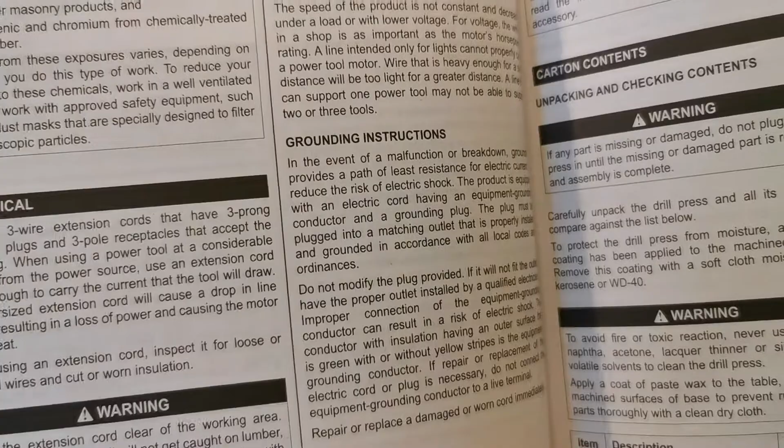There's a list of the parts that should actually be in the box, which is helpful if you want to actually use the drill.

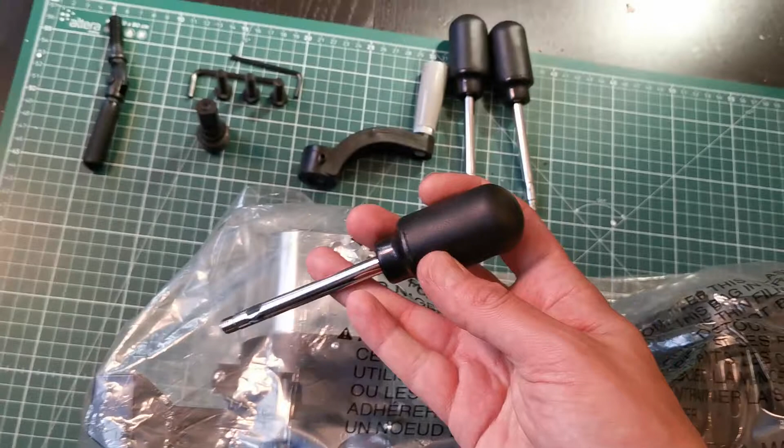So here are the handles. These are like this a bit. It's squishy from the end, but the sides are actually pretty firm. Can you see it? I can stick maybe just a bit of my fingernail in it. But here's there's like an air pocket inside there, so I don't know. This seemed to be some kind of plastic, rubber, something.

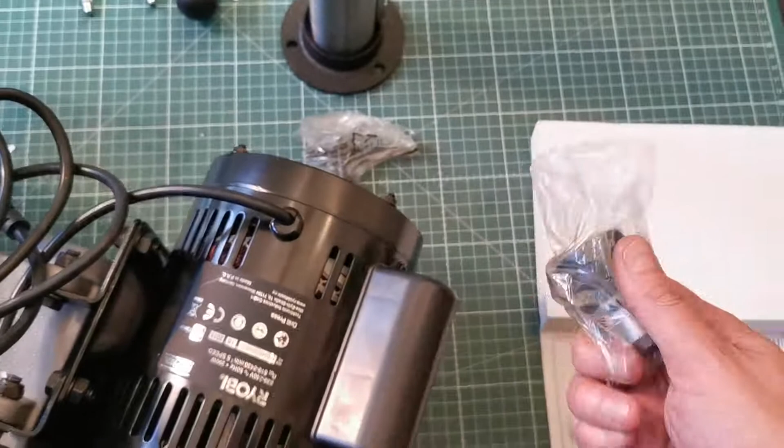Alright, I'll remove the wrapping from the stuff and we'll continue. So I've been peeling off the wrapping from this, and there's the chuck key. I'm pretty sure we have everything we need to put this together. The chuck came in a little box.

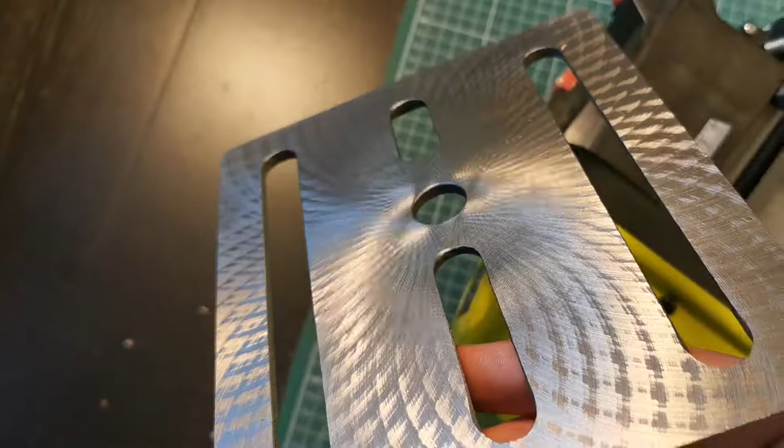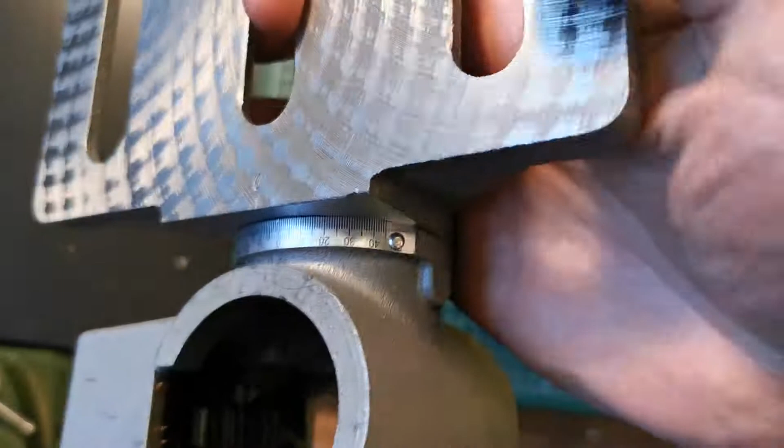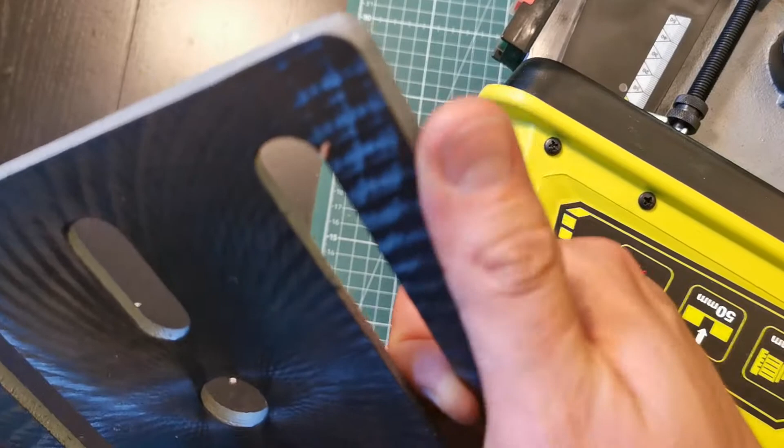This is pretty, well, this isn't really a precision machine anyway, but you might want to sand this a bit or do something. The edges are, well, you can't cut yourself, but you might scratch the piece you're working on, like if it's some kind of wood, and you hit it on that edge or slide it across, that might actually scratch. So you might want to file these edges down a bit.

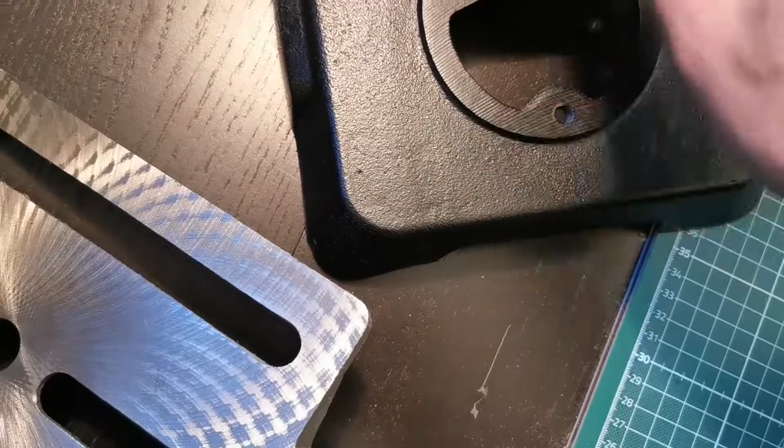Yeah, they didn't really bother to do much with the edges or anything, but I guess it's fine. At least there's a coating on everything, so it shouldn't start to rust too quickly.

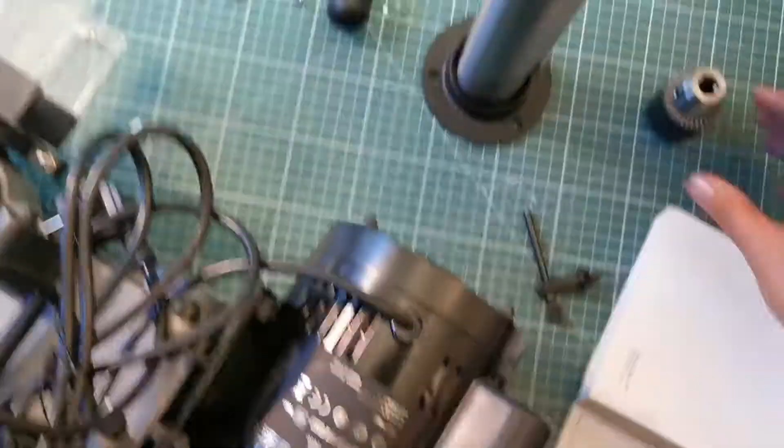It does have some slack in it. I guess it's fine. Let me turn on the light. I don't know, can you see in there?

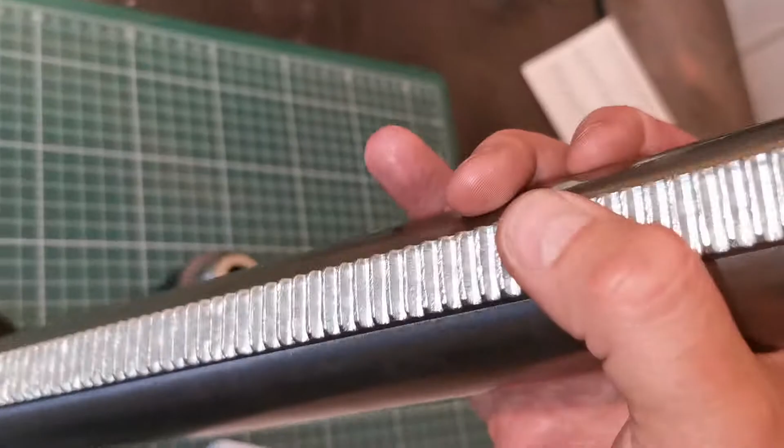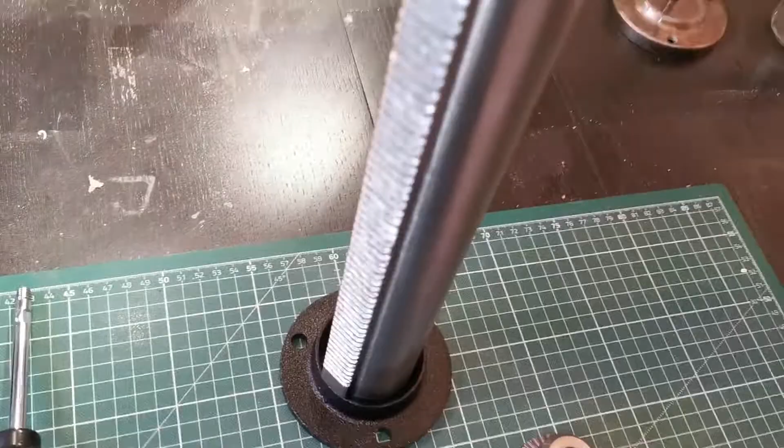The finish, well, it's not polished. You can't really see much of a reflection on my finger. I don't know, man, doesn't look too great. But it's not like we're building watches or something with this machine anyway.

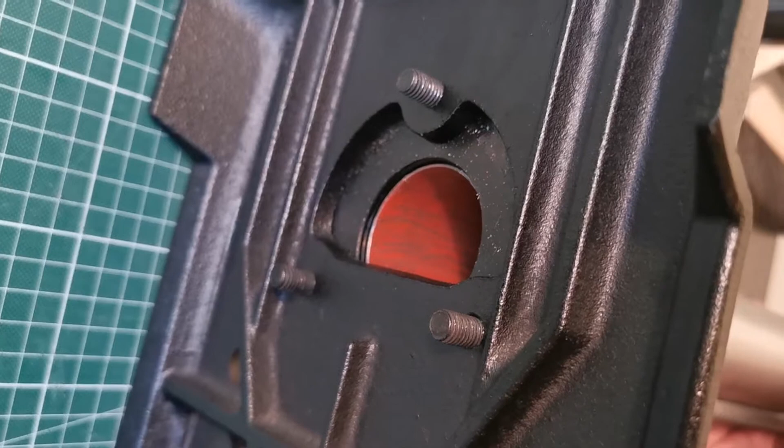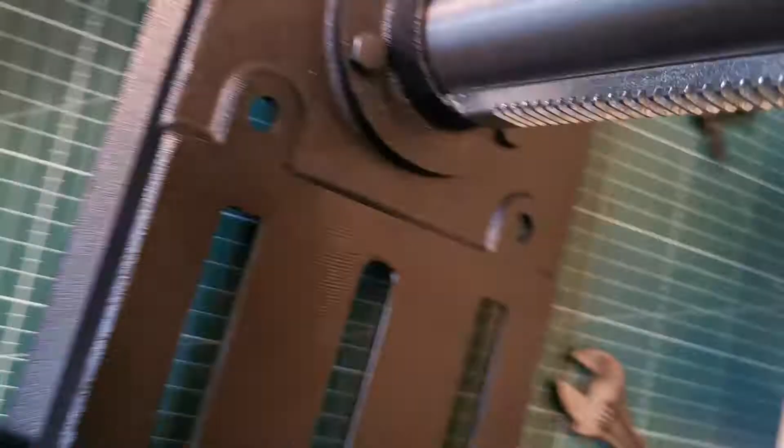It's just 3 screws, or nuts, I mean bolts. You only get the 3 bolts, you don't get the nuts. For the other side I guess you don't really need them. You don't get any stupid tools with the machine, which is fine by me. I'm pretty sure everyone has some kind of wrench around.

Anyway, one thing I just realized is there are only 2 holes on the base. Might be nice if there were like 2 more here, so you could actually bolt the machine down to a table if you want to. Of course you can still do it, but I don't know, it would be nicer to put the things through round holes. Like how do you put a bolt through that?

Like this is easy, this is easy, makes sense. But I don't know, is this actually?

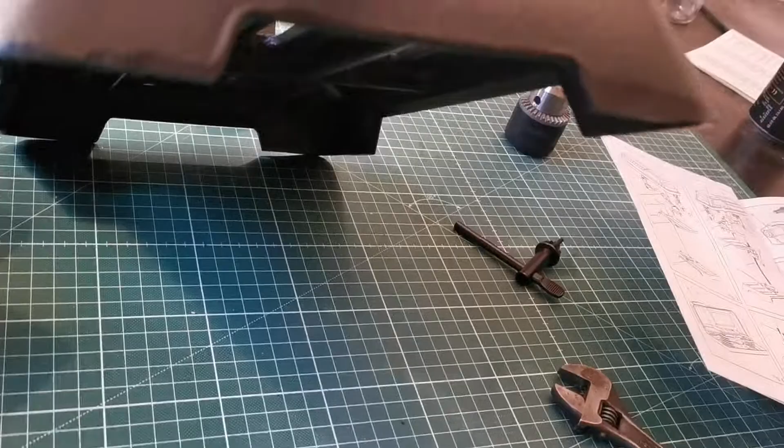Yeah. I doubt that it's my actual table, I think it's this. This has some wobble to it, so you might want to put something under there to prevent it from doing that. Let's continue. The table doesn't wobble too much when it's going down.

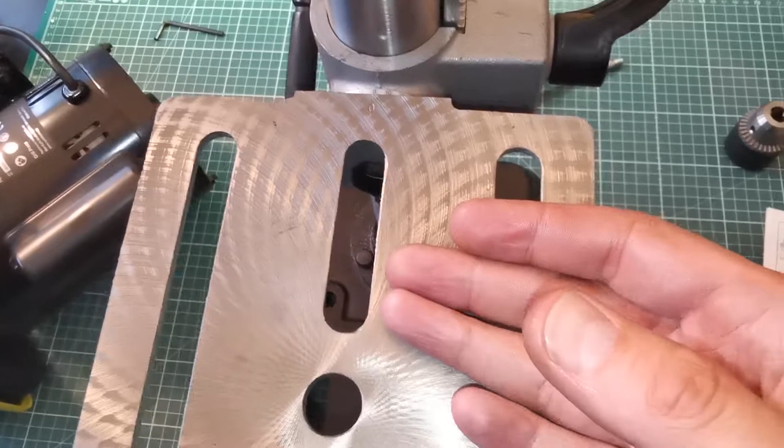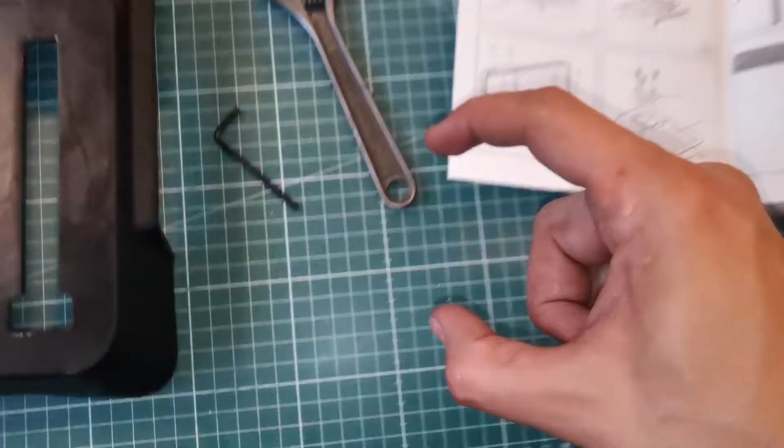It's a bit loose. Yeah, not a huge fan of this. I don't know, like if you're drilling something, I think the maximum movement on the drill is actually like 5 centimeters, so this much. So if you want to make a deeper hole, you have to move the table around, and then you lose the center.

This is supposed to have like a laser X on it, but still you always have to move the piece around and everything, so I don't know, we'll see how that goes. This is like really loose, you can't really tighten it down anyway. I don't know, it's held in place with 1 screw.

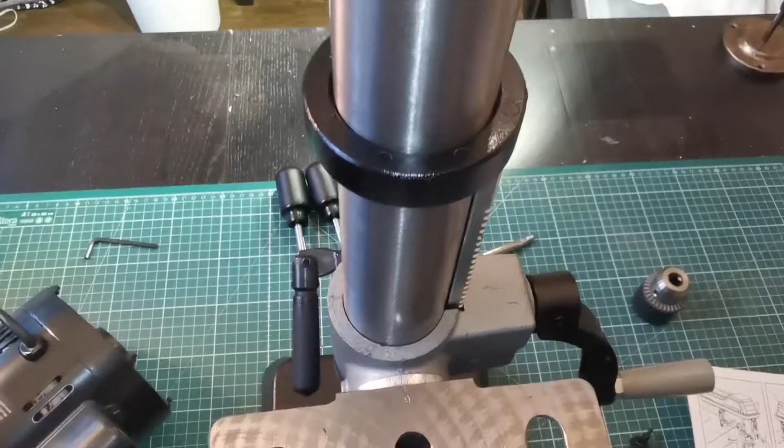So no matter how hard you hammer it down, it will just be held in place with the friction from this. So that was weird, let's continue.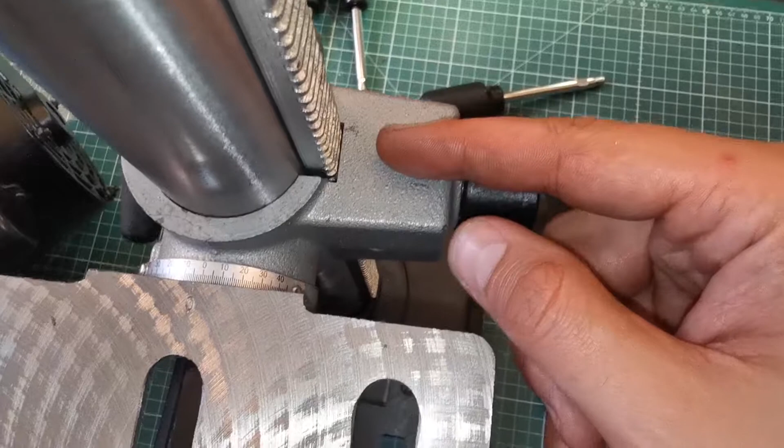Oh my god, I'm sweating. One thing, in here you have that worm screw that's engaging with a cog that's engaging with these. It is actually lubricated, this isn't sweat. That was a nice surprise. There wasn't much lubrication in there, but there was some, so it shouldn't be the first thing that starts to rust.

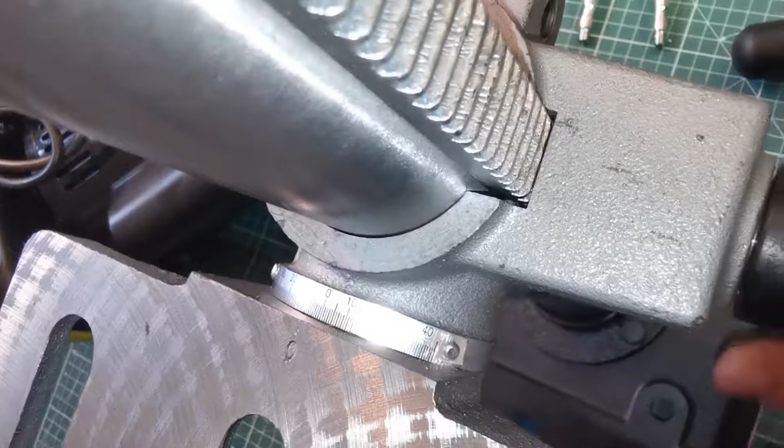But it's probably a good idea to take this off quite often and stick some lube in there.

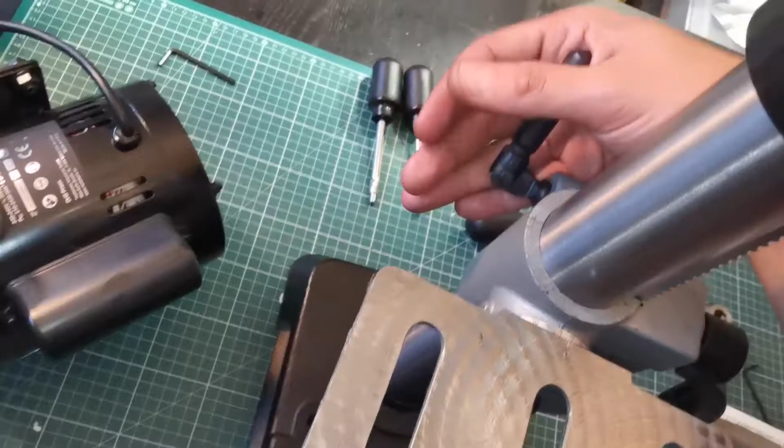Yeah, well, goes to show that I'm not an expert. I just realized why it is so wobbly. It's because if it's loose, of course, then you can rotate this whole table around. So it was a feature, not a bug. Of course, you can lock down the table from behind here, so it stays in place, more or less. Yeah, I'm not an expert, I'm just showing what I got in the box.

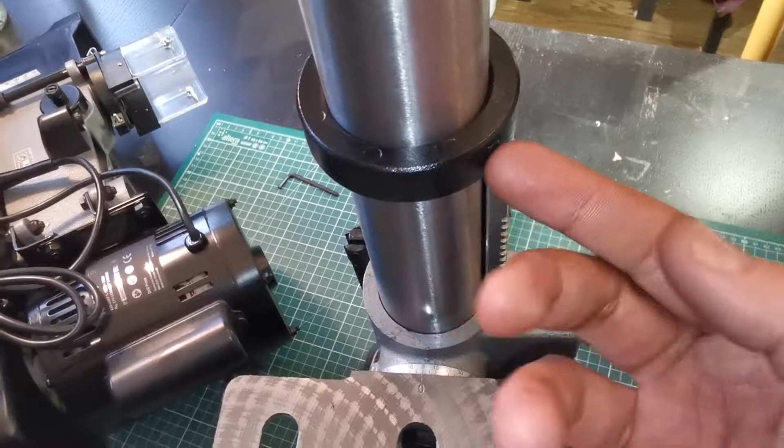When you're putting this bit down, just tighten it slightly, or not actually at all, not much at all, and then start to rotate the table. Keep the Allen key in there, in place. Rotate this around when everything is kind of resting there on their own. Start tightening it up.

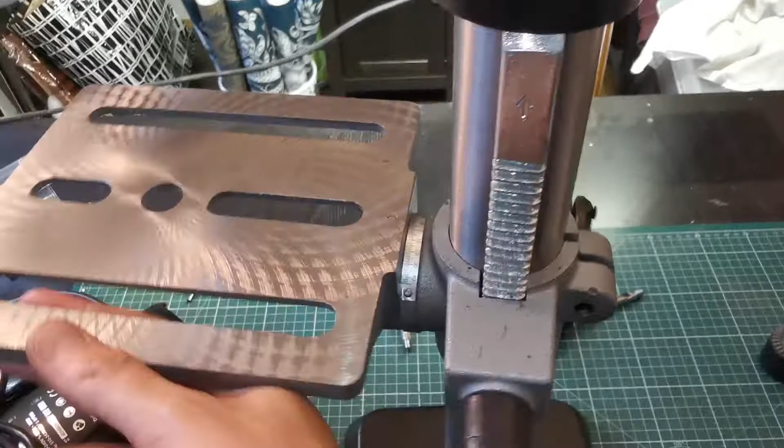So this piece actually stays fairly level then, and this table can rotate smoothly around, and then just tighten it up. Because if you just plunk it down there, tighten it up, then start to rotate the table, you will notice that this piece is mostly a bit crooked, so the table will get stuck and you can't rotate it around freely.

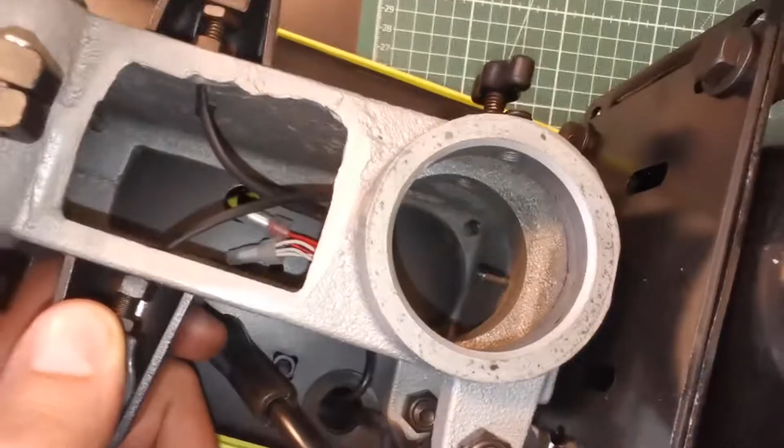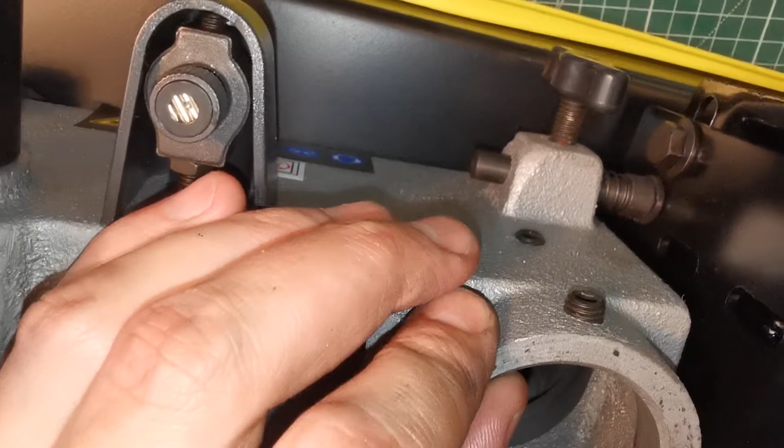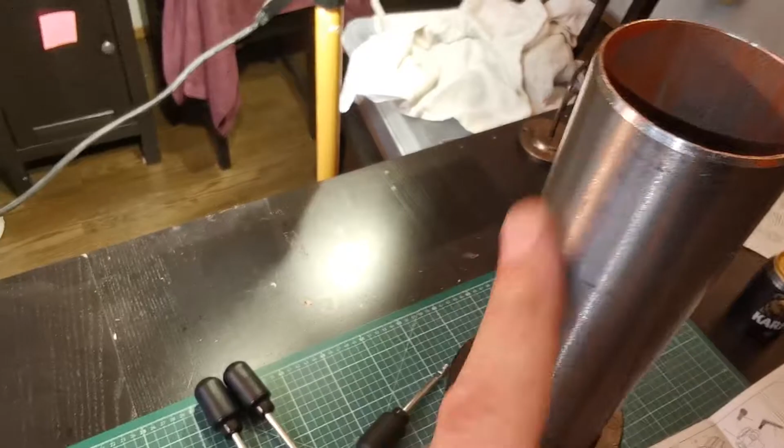Alright, let's continue, so this is interesting. This is the hole where this is supposed to go into, and you got some screws here that I suppose are used to tighten it around this piece here. But correct me if I'm wrong, this whole thing will be resting on this little thing.

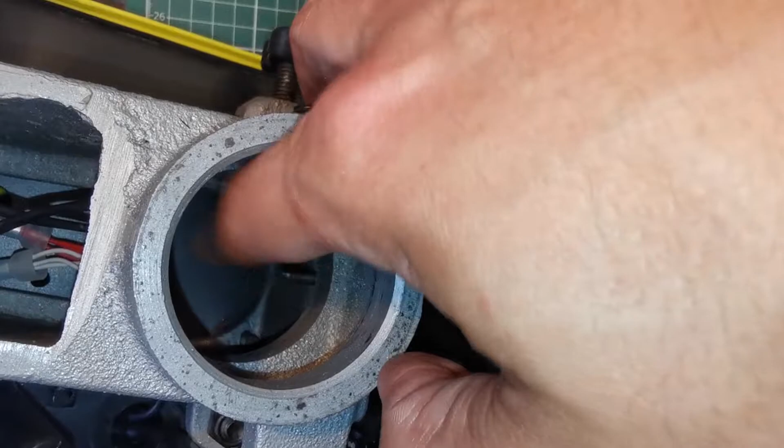I don't get it, why doesn't this shaft just go all the way down, or why isn't there like a flat plate or something, or more something bigger than just this? Because that's not a big piece of steel, which is kind of odd.

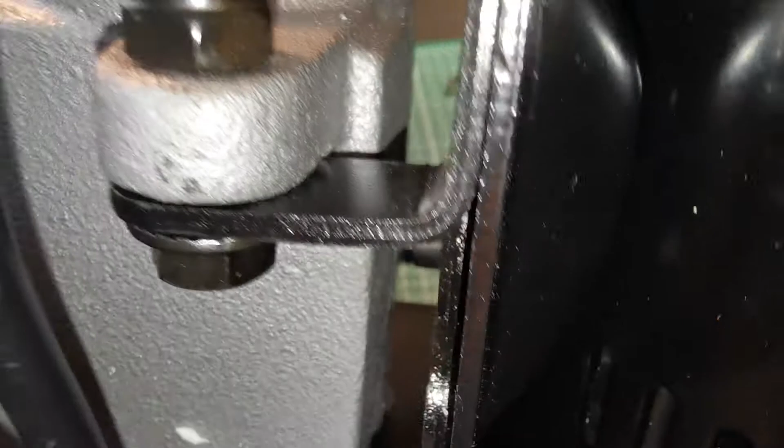Here's the motor, I guess it's somewhere in there. Oh yeah, there, that little nib in the center, I assume it's the other end of that. I'm no expert, but it looks a bit weird. There's some sort of work lights just dangling in there. So now I'll be lifting this in place and see what happens.

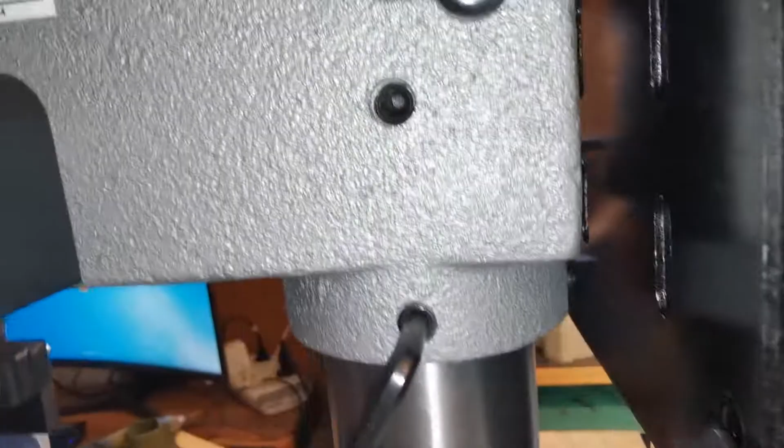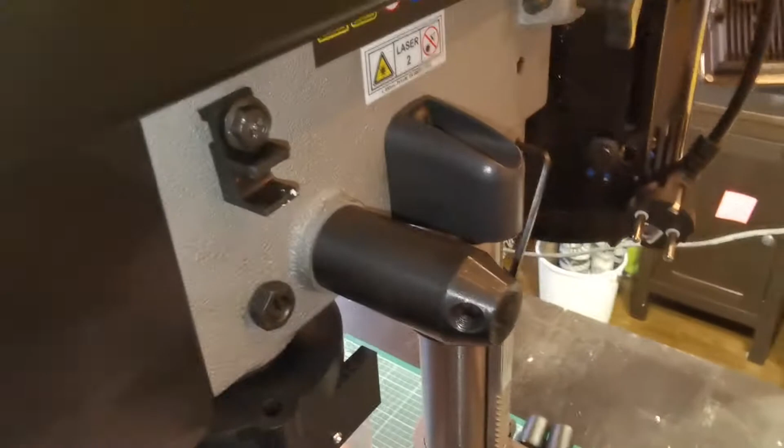Yeah, so basically these are just the two screws that are holding this head assembly on the shaft. If you tighten down, it won't be moving. But this whole thing is resting on that little thing, where is it there? Yeah, that little thing. I guess it's fine, but after a long time using the machine, all the vibrations, who knows if it's gonna snap or something.

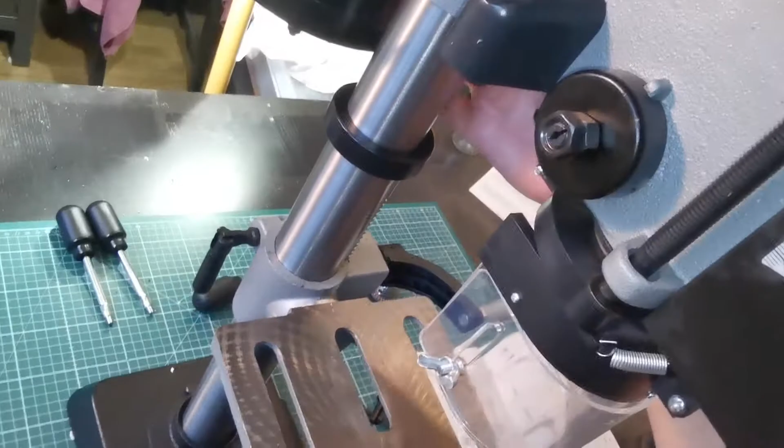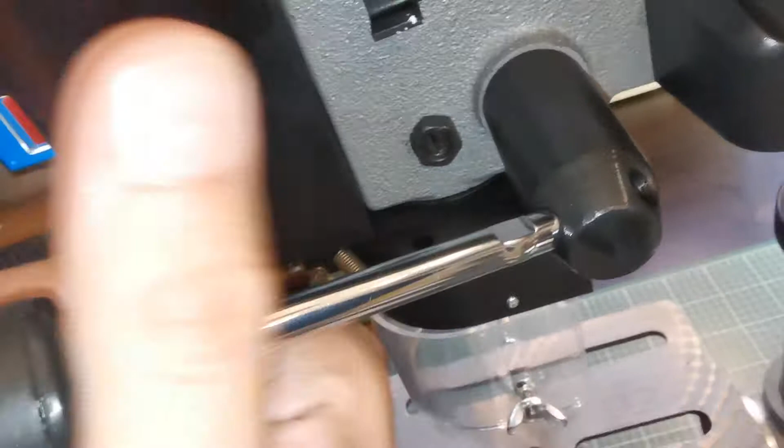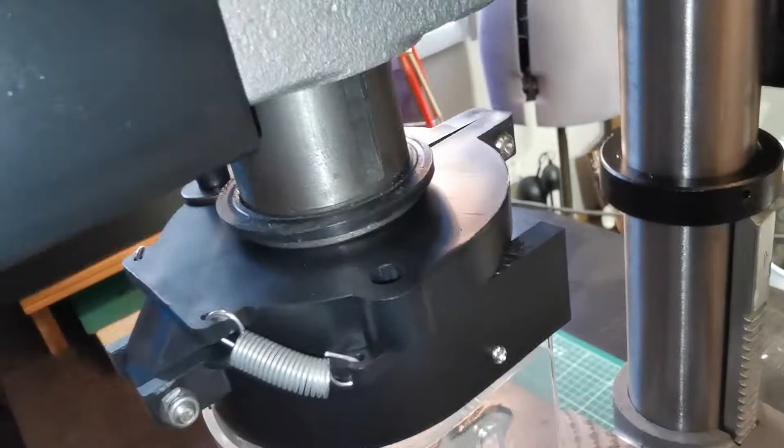It's nice that they actually have these cutouts, so you can tighten them properly if you want to. Oh man, there's metal dust in there already. Or is that some kind of graphite lubrication? I really don't know.

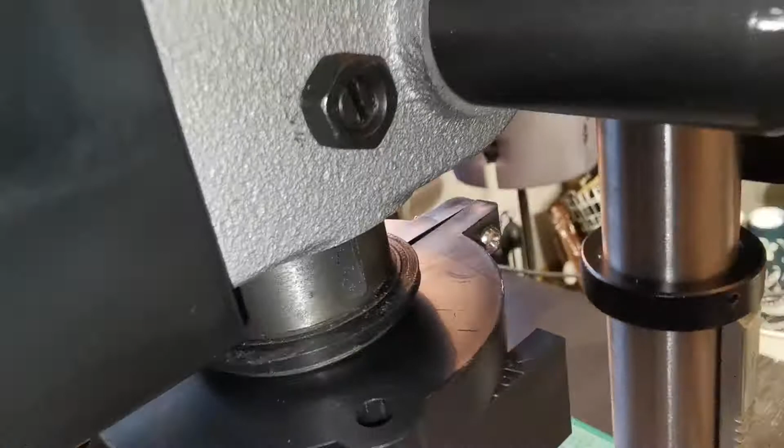Yeah, 5 centimeters. You know, 5 centimeters, it's enough when you know what you're doing. You know what I mean.

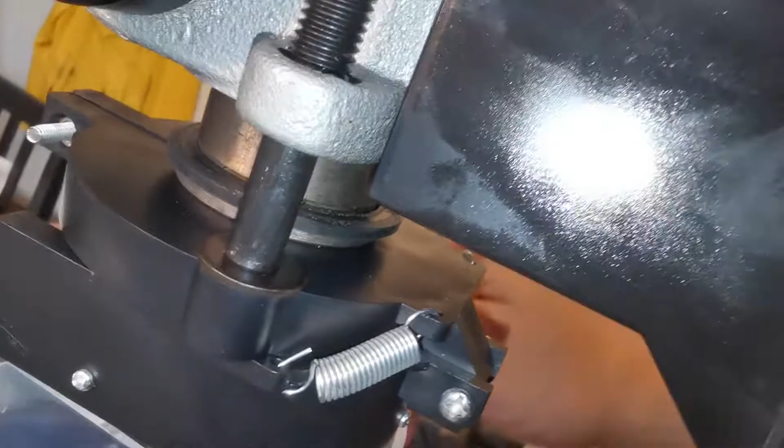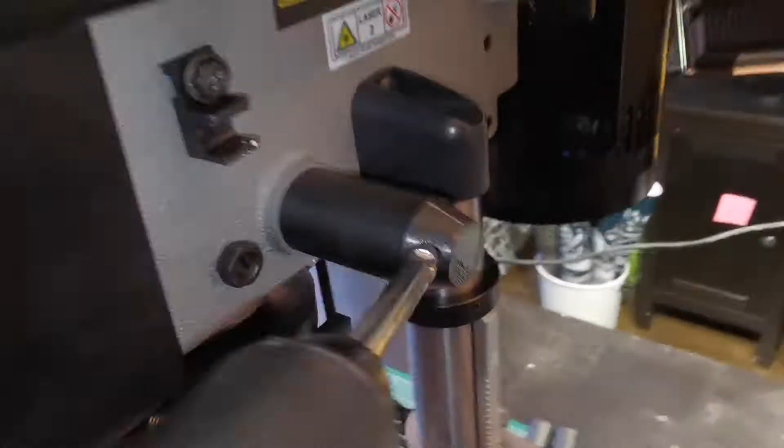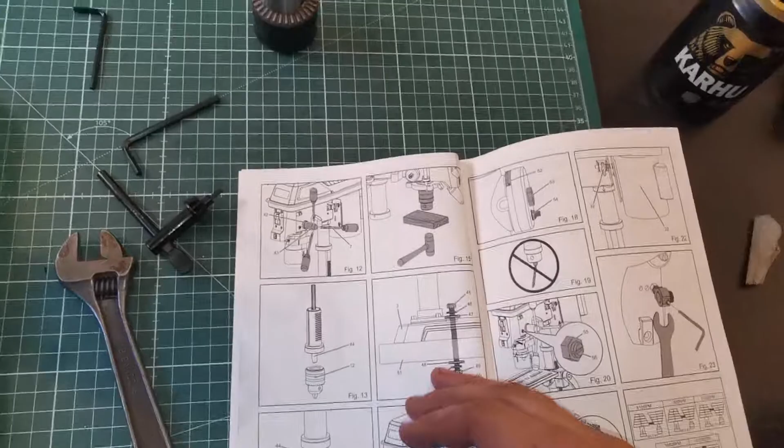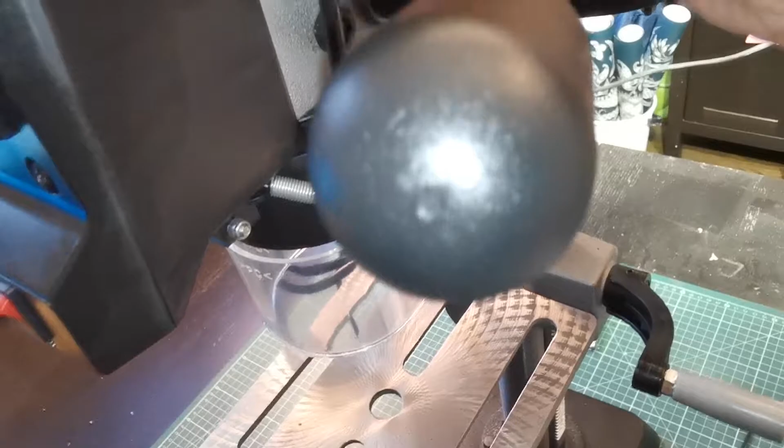Let's take a look inside. How do I open this? Motherfucker. Hammer? No. That's the chuck, oh there's a place for this. Alright, so it was just held down with this screw through that.

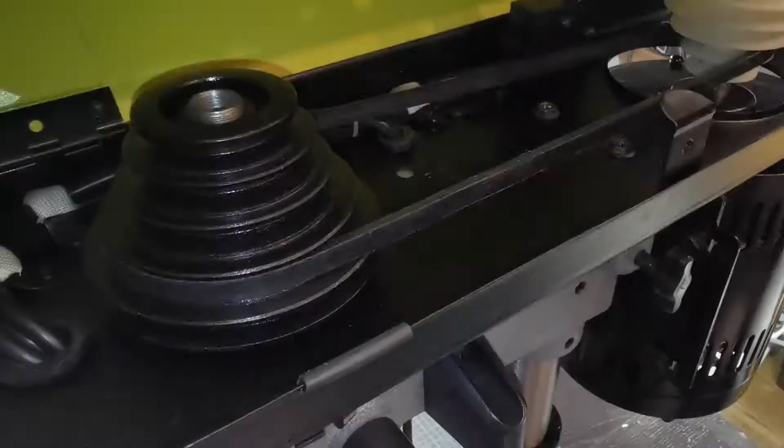There's like this kind of a spring loaded, or what do you call this, flat springs. So you're gonna plonk it down. The cheat sheet for the RPMs.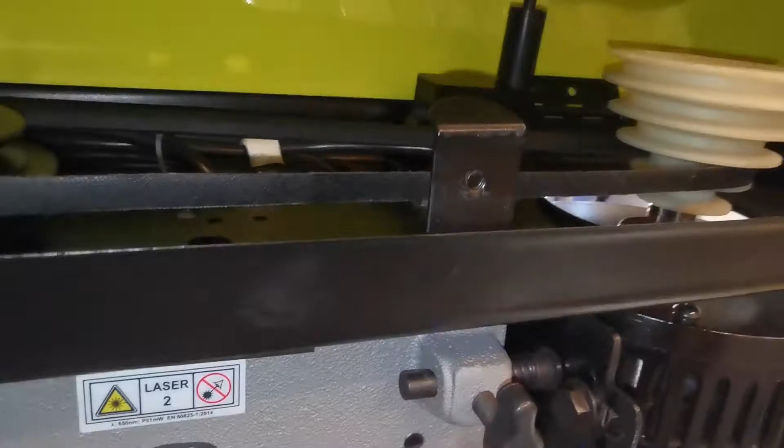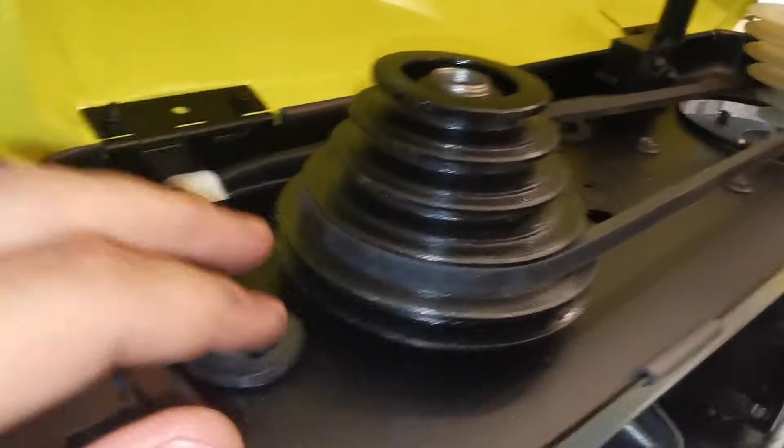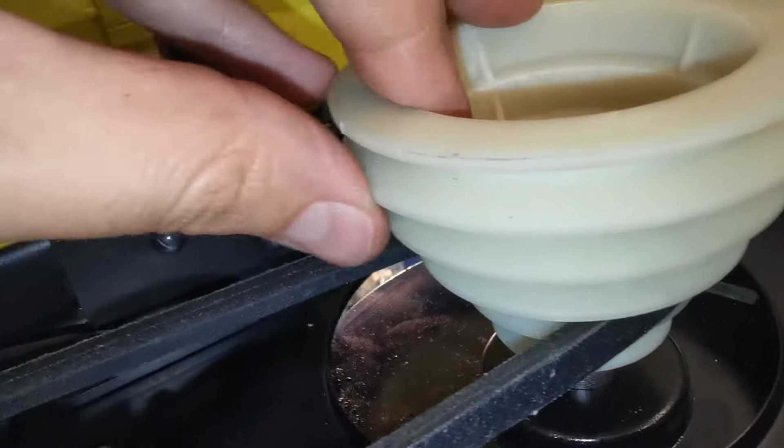Yeah, this thing is just plastic, it's gonna break. And this, by the way, isn't plugged in yet. So this one is steel. This one is some kind of reinforced fiberglass reinforced plastic, I assume. It feels like a bolt. It's kind of rough inside, so I don't know, but I assume that's some kind of a bit more durable plastic.

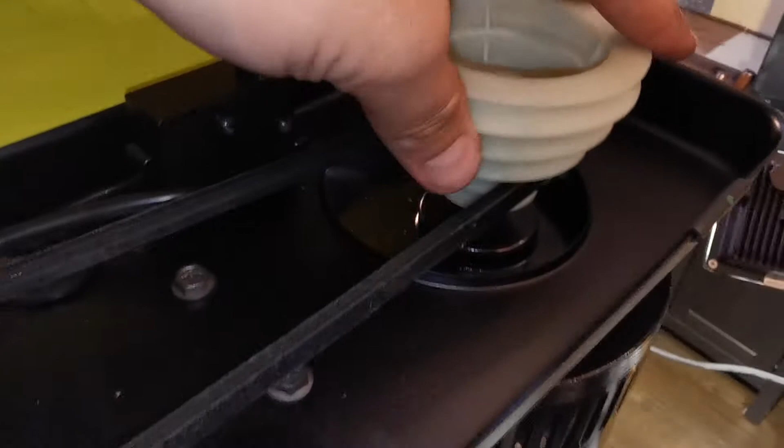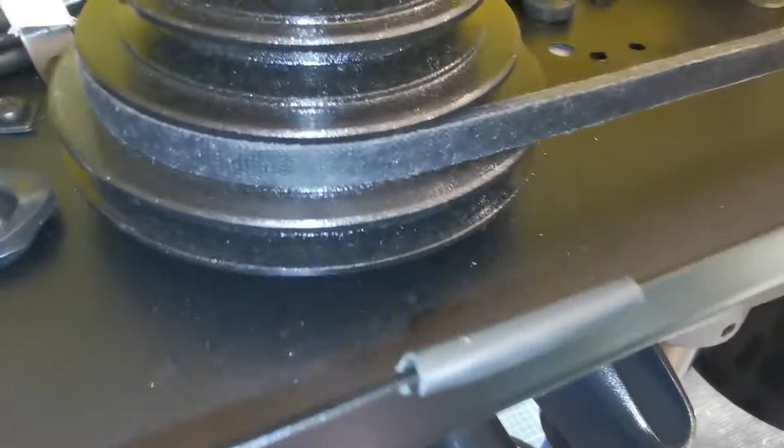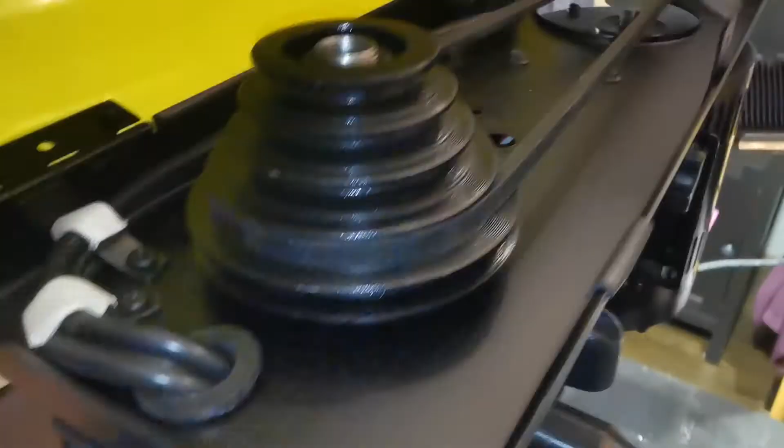Alright, oh there's like a safety switch here, so you can't switch gears on the fly. Kind of a shame, you know, you save some minutes when you're in a hurry.